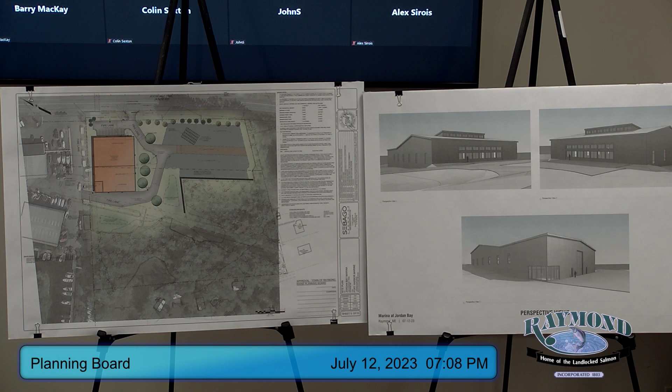The major things — we have taken the building. Before we had a lower level that had some maintenance areas and a bathroom, and we're going to relocate bathrooms that are on the site now into the corner of the building. We had some showroom offices on a higher elevation that fronted 302.

We have changed the building now; it's intended to all be for boat storage. You will see a little square in the lower left-hand corner, because we are still relocating the restroom, bathroom, shower facilities over into that area, so that will be collected.

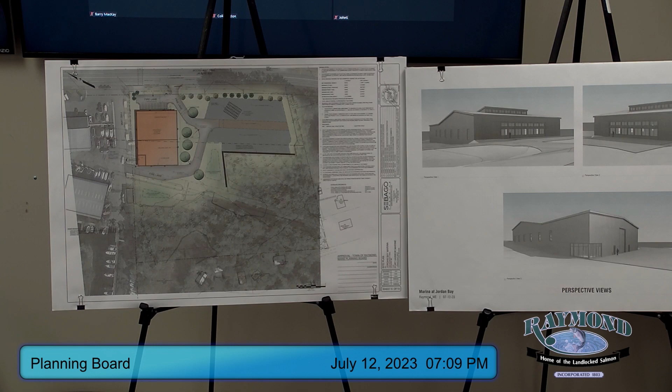And then we are relocating our septic field. You can see up there in the gray area, there's a crosshatch area. Before we had the septic area down below the building, closer to the lake. Because of the size of the building, we had to relocate that. We had done test pits up there initially, so we knew we had good soils, but we had to expand the system a little bit because of the change in soils.

As far as the outside storage, once again we made a decision that the best thing was to try to create some additional buffer for our neighbors and also reduce the amount of wetland impacts we had initially proposed. We've gone from around 34,000 square feet of wetland impacts down to about 20,000, with the preservation of that area you see in the lower right-hand side below the gray boat storage area.

There will be a change of grade there, so we have a segmental retaining wall that will be there, which is kind of good because it will keep people out of that area — there won't be any intrusion in there at all.

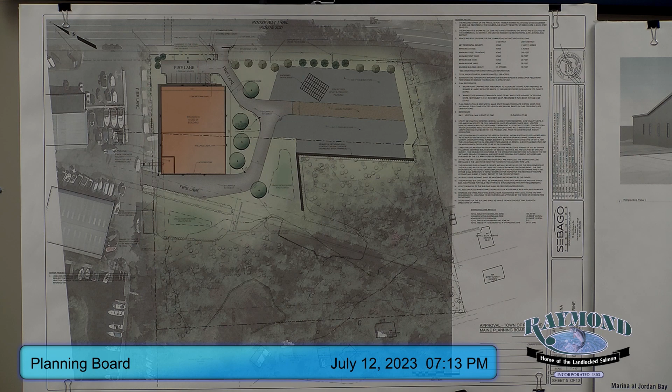Basically everything else was essentially the same. We did relocate our stormwater areas slightly. The one on the left-hand side, directly below the building on the lakeside, got significantly smaller. The one that paralleled the Portland pipeline easement has been moved over adjacent to that wall—you can see the L shape there. The part of the L that goes up towards Route 302, right next to that, is our other treatment area for the site.

We've reviewed all the comments, and what I'd like to do is go through those really quickly. There was nothing that stood out to us.

First, I'd like to give you an update on all the other permitting we've done. Army Corps of Engineers—we have a permit. We had a permit for the prior project, which we submitted, I believe, to Alex and to Will. We're going back to Army Corps to modify that to the lesser amount of wetland impacts.

At the same time we submitted to you all, we submitted back to MDEP. We had asked them to hold off on it. They were ready to issue back in the fall, but we knew we'd be changing the site configuration, so we put it on hold.

It's back before them now. The two processes we have are a Tier 2 permit for wetlands and a stormwater permit. The jurisdictional timeframes for review are a suggested 60-day target for the wetlands, a 60-day target for the stormwater, and 90 days guaranteed. We assume based on staffing levels and how busy they are, we're probably going to be more towards the 90-day period since I'll combine both of these together.

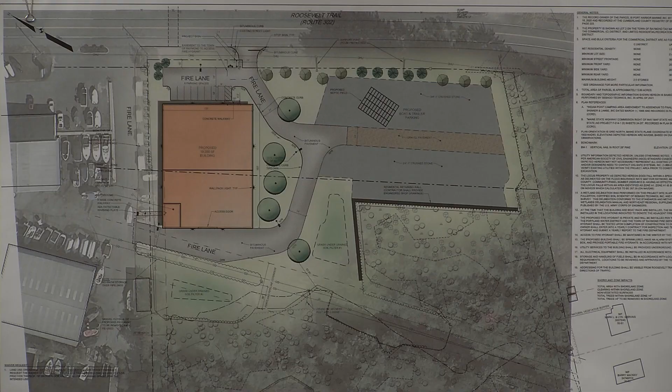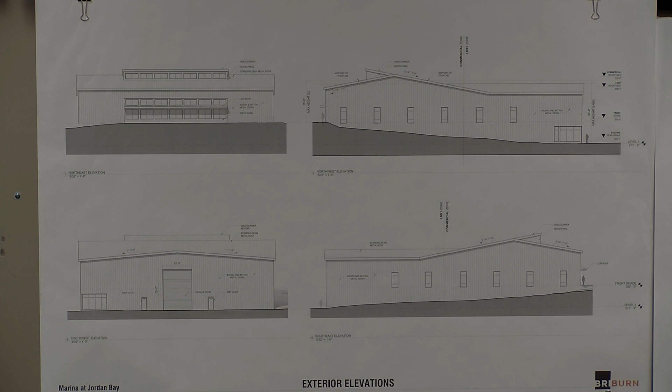Because I'm not an architect, I'm going to use cheat notes for this, because our architect wrote some very good notes. One of the things you'll notice is that the front of the building mimics what we had before. We wanted that low roof line with the dormer effect on the front, and the window and glazing to match.

Excuse me, Rob, if you're going to have conversations, could you please take them outside during the meeting? I'd appreciate it, thank you. Go ahead, Rob. Okay, thank you.

So we basically mimicked the same frontage so that we have that look of the New England barn type look, with the dormers and whatnot.

Originally, in talking with the manufacturer for the rack system, and this comes into play further down, we have two height restrictions that we need to meet: one in the shoreland zone of 35 feet from existing grade, and the commercial zone allows 2.5 stories from grade. Technically this is a one-story building, but we assumed it would be interpreted as 25 feet, so that's what we used as our guide in the front.

So our mid elevation on the roof, between the eave and the peak, meets that 25-foot elevation as a peak.

Previously, when we looked at this, the back would be a sloped roof to either side, and then when you got to the commercial zone, it would just pop out and slope to both sides.

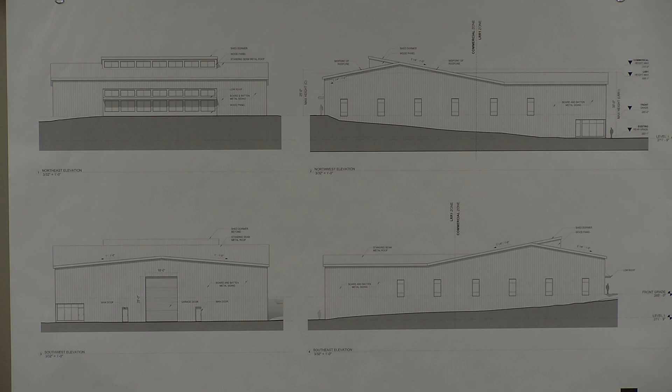So that's kind of an overview of what we've done relative to the building and how it relates to the commercial zone design requirements and whatnot.

You're going to submit a kind of narrative on that? Very long narrative. I'll use my best engineering practice to reduce it down a little bit.

Going through the comments quickly, comment number 3, we've asked for a waiver once again on the parking. We don't need parking. Before, when this was before you, we had 18 parking spaces that we were proposing to put out front. The board had looked at that and agreed with our assessment that based upon the use of this site and the nature of it, additional parking was not warranted, and that I believe the board made not a finding, but a kind of general consensus that you were okay with that at that time.

The next comment relative to the internal landscaping, the same thing there. During the discussions that we had, because of the vast amount of landscaping we had in that immediate area around the front, you weren't really concerned about 100 square feet of the internal landscape area. The parking is much smaller now. Probably the landscaping adjacent is probably a little bigger. So we assumed that you would come to the same conclusion on that.

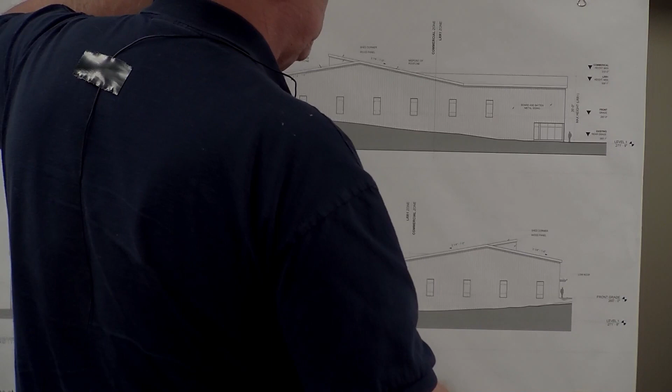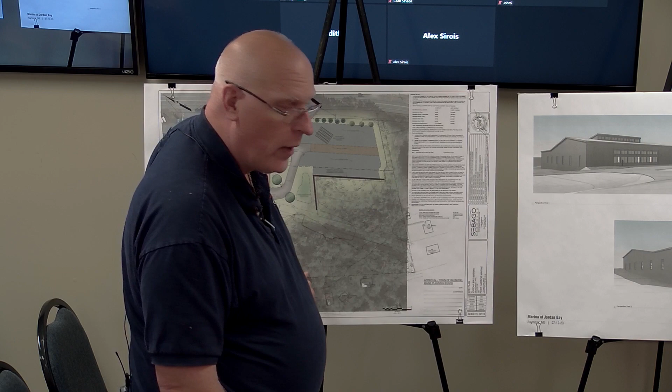Most of the wetlands on site are forested wetland. There is an open wetland right here, so as Will rightly noted, we basically looked at 100 feet from that open water. I'm going to ruin my plan here for a second so I can show you — currently the closest deviation from that is right here, where there is existing impacted area. There's actually gravel parking; we're taking it out and we're going to revegetate it. So that's not intended, and we can put a couple trees there if we need to and let it just do its thing.

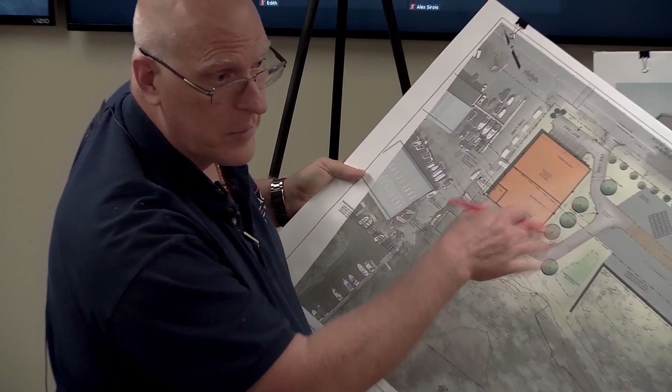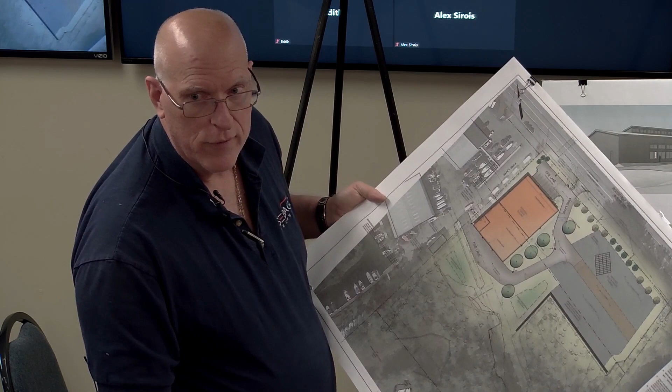The other one is right here. We assume that's going to be taken over again by trees. It was there as part of the grading that we needed to do for the drainage pipe that comes under here. I noted in the response that that's 184 square feet, so I assumed that would fall under the 250 feet for the ordinance, but we did look at that comment.

Number 9, Will made a good comment — we didn't put any elevations on the top of the wall or the toe of the wall. We're going to be adding that. The wall that parallels 302 will be 2.5, and then the other wall that comes to the south is going to be down about 1 foot to 1.5 foot at the top. So we'll put those elevations on, and we're going to indicate the toe of the slope so that the person who has to do the shop drawings that will approve will know how deep to make the wall.

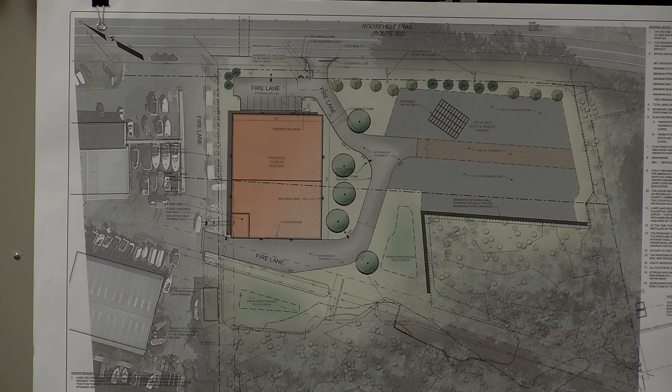There is a note on, I think, the site plan that says the shop drawings need to be submitted. It wasn't on the construction plan.

Number 10, relative to the narrative, relative to Article 9, we unfortunately didn't look at the brand new 2023 ordinance, which changed the A to Z numbering to 1 to 27, adding one more item for solar systems. So on the response, we moved all those items in our original package and correctly numbered them instead of lettering them. We had already responded to those. The one extra item added in the code doesn't apply since we're not doing any solar.

There's also a narrative relative to how we meet the Chapter 350 standards, similar to what I went over at the beginning about the percentages of impacts and how we minimized and came down to meet the requirements relative to those percentages. I still need to add a note about the 35 feet — I think it was somewhere in the original package narratives, but I'll add it into that summary as well.

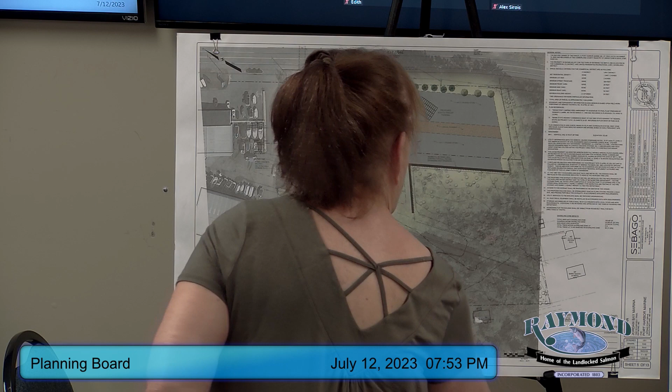And of course the people from the town know that when they come to inspect. But I couldn't come to the last meeting that addressed that, and I wondered if the amount of drainage was going to affect Indian Point, because we have a bathhouse that's right here, and my site is right here, and over the last 33 years it's gone from a site to a swamp really bad every year.

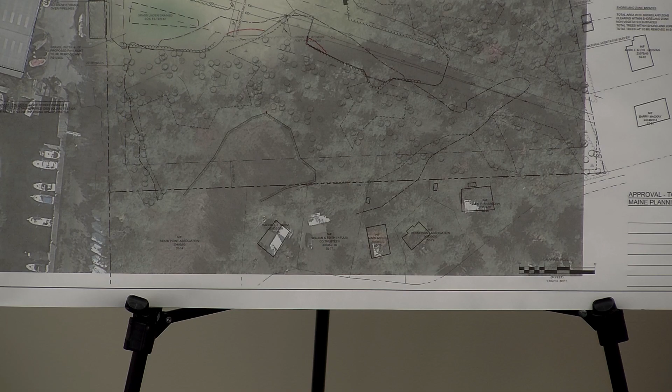And I know that we have filled our road every year so that it's not just a complete mess, so people can get out there. But I would think that would have held some back, but it doesn't. And on my site there was a pipe that came out from, I don't know where, like from where the bathhouse is, or under the road or something, but it comes out into the water. I haven't seen stuff coming out there, but I don't want to go up to my knees in muck to check it out. But anyway, I just wondered if they had any estimate of how much water is going to come out, and if it's going to be able to be absorbed or incorporated into the wetland, and where that's going to run off, because otherwise I'm going to have to fill.

Rob, this is your water flow diagram, isn't it? The last sheet, sheet 2 of 2?

Yep, what we do is, and Will can attest to this, we design two items as part of the stormwater system. One is for water quality - there's a treatment component relative to the amount of development we're changing from a natural condition, adding impervious surfaces. So there's a water quality element.

There's a second element, basically the pre versus post element. That's not required by DEP for this size project, but it is required by the town. So we have to mimic or limit our discharge in peak to the same that was going to that area previously. You can see that whole wetland complex went that way, and we've divided the watershed to mimic that. The stormwater calculations show we're not putting any more water there than was previously put into the wetland.

This site basically drains into that wetland and goes on that page to the left, into that open water area I previously mentioned. It gets to that and then down. Can you go up and point to that?

Allison, I'm going to give you this - if I'm correct, this is the water flow diagram, isn't it? Am I on the right one? It's a watershed plan, yeah, it's pretty ambiguous because this isn't the engineering plan. Allison, he's going to use this, and hopefully the arrows will show the flow of the water.

So the water will come out of this detention area. We have a pipe system, and it feeds into the wetland right here. The natural slope of the land goes here, where it gets into what is considered a wetland by definition to the town - what used to be the Loon Preserve.

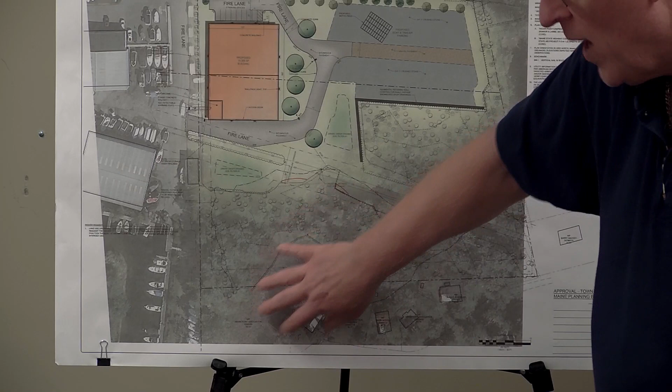Whatever you call it - it used to be a section of land you couldn't do anything with. Yeah, they called it the wetland area, or Loon Preserve at one point. I think they called it that. Right, and so that goes and flows down.

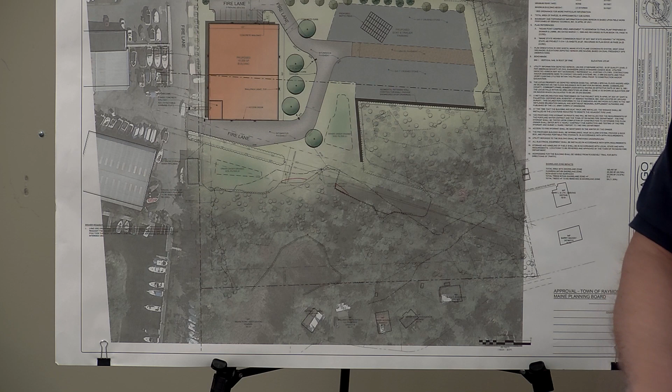When you say water quality testing, what does that mean? This is a bowl we put in the ground, and the water goes into the bowl. The water has to go down through the soil, through a special media that we put in, and part of that takes out the hydrocarbons, sediment, and stuff of that nature to clean up the water. Then it discharges off after it meets the water quality standard.

So then it's going to drain into the wetland. When they put all the extra boats out there, they said they'll test the water, but that's never happened. How do we know this will be fine? I haven't swum on the beach since all those boats have been out there.

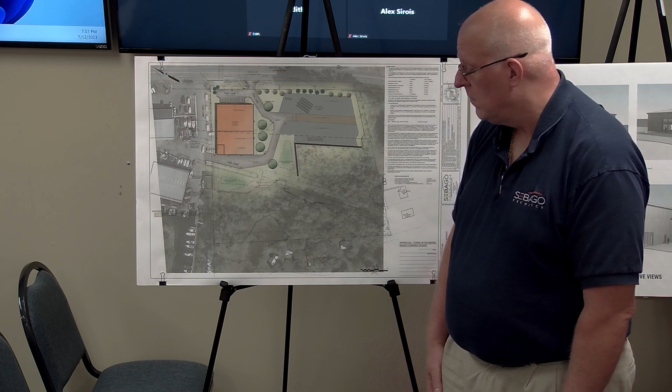Okay, this is more public comment now. But when he says it's going to be tested, is that going to be in the budget? Yes, that is part of the budget, but your concern is the flow of the water into your property, and that diagram and his explanation will show you the flow of the water.